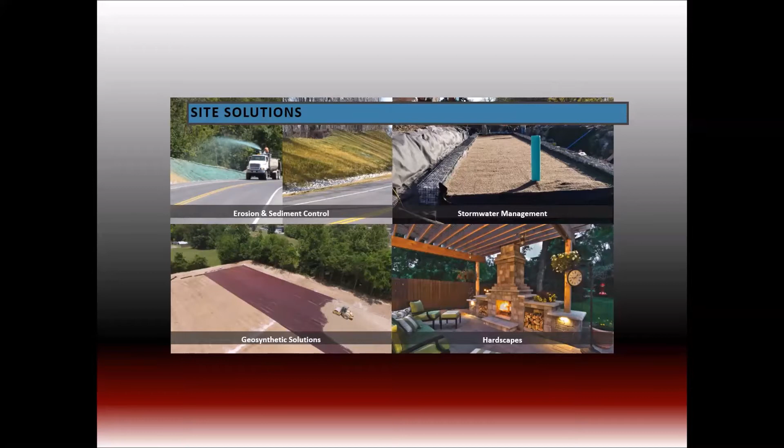And today we're going to talk about one particular solution, which is a BMP. It's just an excellent solution for construction in all of those markets. But I just want you to be reminded that we do carry a whole lot of products, and we are experts at warehousing and logistics.

And one of the things that people like about us is we can put together a custom truck, and we can deliver to the job site exactly what you need and when you need it. Just give us a call and give us a chance.

But like I say, we do actually service some projects that are outside of that mapped area. And we also carry products that may not show up on our website. If you don't know about it, or if you don't know for sure if we carry it, just get a hold of us. And if you come across a really innovative solution, contact me. That's something I do on a daily basis. I'm constantly evaluating what's available in the construction market, and we have a new product committee, and I'm blessed to be a part of that. We are constantly vetting solutions to continue to find the best alternatives for our customers.

So with that, I'm coming back to this opening slide for my friend Chloe, and she has a really awesome personality and a really neat way with people. But when I read her bio, you're going to think that she doesn't have a lot of experience in construction, but that's not true. Her entire career has been in construction.

And one of my favorite things about her is relationships, and that happens to be her title. Chloe Moretz is relationship manager with FODS. In her role, Chloe works as a support liaison to engineers, specifiers, and governing bodies in regards to the FODS system. Additionally, Chloe serves in a business development role, supporting FODS customer relations. Chloe's worked in the construction field for the duration of her career, as I mentioned, and she truly enjoys the innovative, hardworking industry. When she's not talking about trying to keep dirt from leaving job sites, you can find her enjoying her hobbies: skiing, hiking, running, keeping her kid alive, and talking too much.

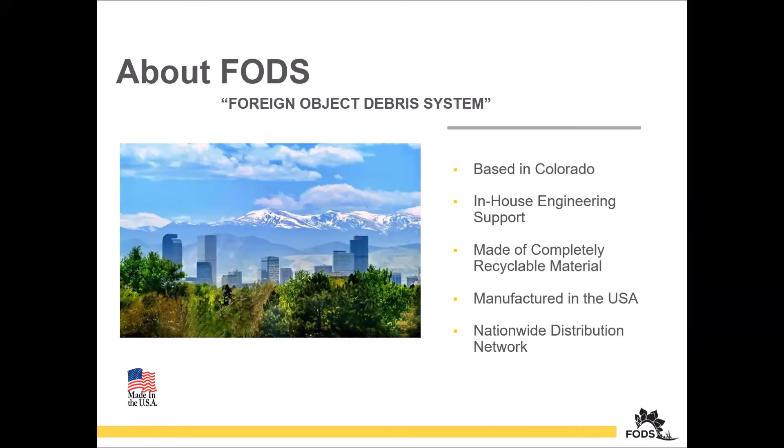Before we get too far, I'd like to take a couple minutes to talk about what FODS are. Basically, FODS are a composite trackout control system used as a substitute for that typical rock construction entrance required by the EPA, which I'm sure all of you have on your sites. FODS provide site access and work to greatly reduce the amount of mud tracked off site by construction traffic. Not only are they ensuring environmental compliance, but they also work to minimize liability. The system is extremely easy to install, remove, and relocate, and it's reusable, with a life of about 10 to 12 plus years, so very durable.

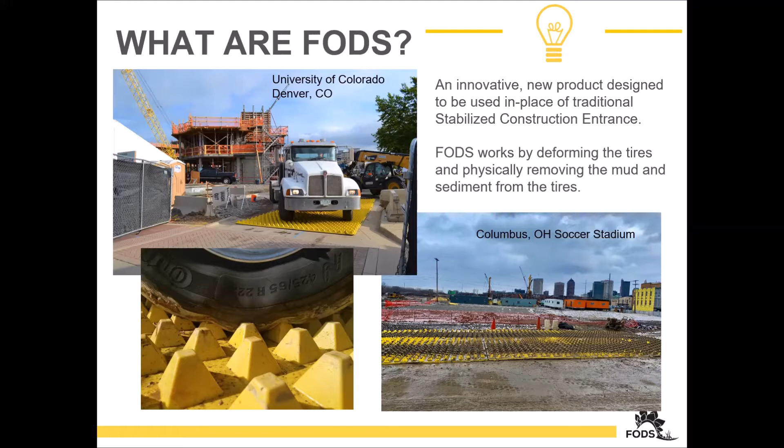If we have any specifiers or engineers on this call, it's pretty self-explanatory, but FODS are typically specified on the stormwater pollution prevention plan or erosion control detail or something similar.

Some quick technical details on the system: it's a modular system, so each mat is 12 feet wide and 7 feet in the direction of travel. The direction of travel does matter—that's the direction the pyramids are staggered in to really open up those tire treads. You can connect the mats together to create whatever configuration works best for your specific site, and we have a bunch of layout drawings on our website that I'm happy to provide you in an email as well.

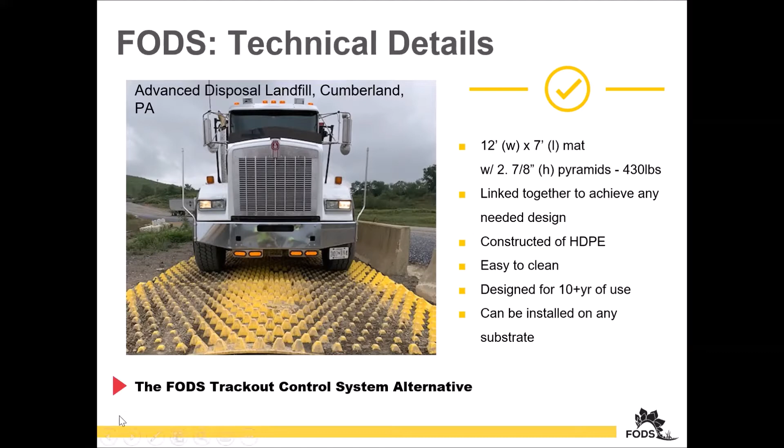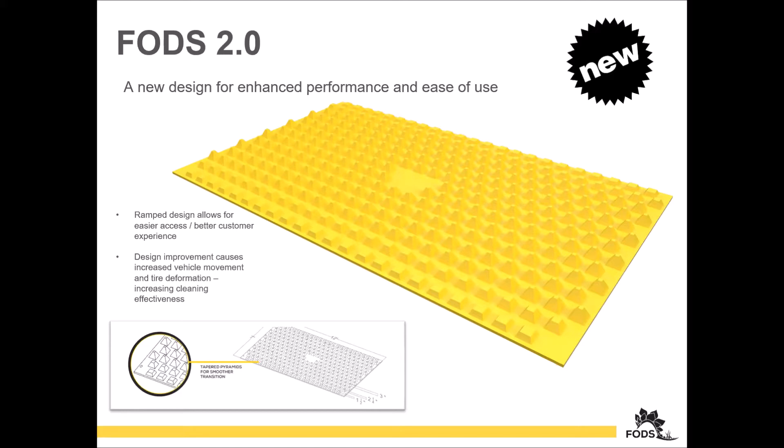We recently got some feedback from several different industries and released a new prototype of our mat. It's just a couple of slight changes, and if you've seen them out in the field before, you'll notice these changes. Essentially, the first few rows of pyramids are tapered in a ramp design to allow all vehicles, including passenger vehicles, to drive onto them easier. Additionally, once they're all connected together, this new design really does increase the effectiveness of removing debris and sediment through greater vehicle vibration and tire deformation as well. So just a quick little update there.

We've had FODS tested by several third-party engineers, one of which was a company called CTL Thompson. They're a materials engineer, and they did various evaluations to determine the strength of the mats. Basically, what they found is they really cannot max out from a weight perspective.

To go into that a little further, each pyramid has a crush rating of over 20,000 pounds. Even your smallest passenger vehicle, like a Prius, that tire's weight is going to be dispersed over at least 4 pyramids, while a larger vehicle more common to a construction site, that tire is going to be dispersed over at least 8 pyramids. So truly can't max out from a weight perspective.

During the testing, they also found that FODS can handle over 1 million vehicle passes of an 80,000 pound vehicle before showing any wear or tear, which really does prove their long life and durability.

Another thing I'd like to mention is the mats have a 15-year UV inhibitor added into the plastic, which prevents them from ever being broken down by the sun throughout their lifespan. On the flip side, we get some questions about cold, and I know we've got some cold areas of the US on this call - you don't have to worry about them becoming brittle from the cold or cracking either. Not a concern.

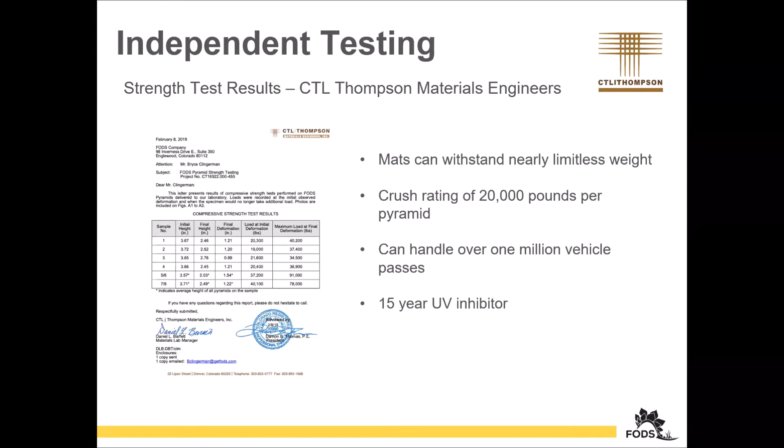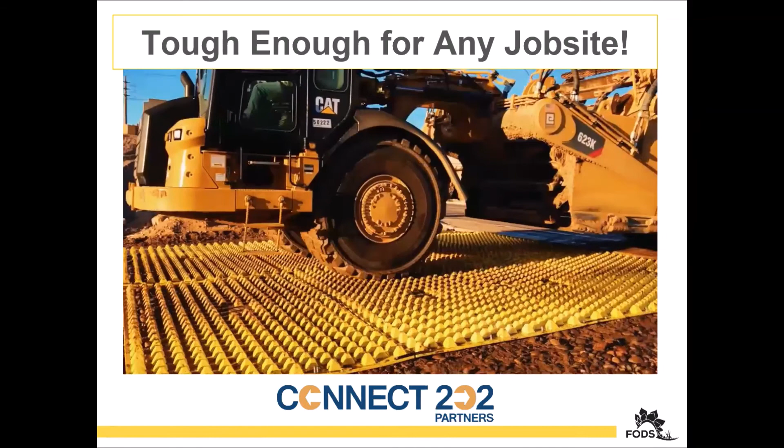I'm going to show you guys a really quick video here that I think does a good job demonstrating the durability of the system. This was taken at a project down in Arizona, actually - a very large, heavy civil project called Connect 202.

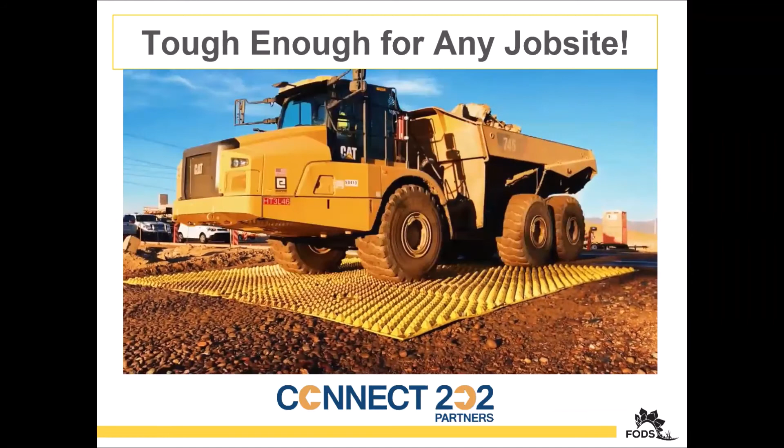What you're seeing in this video is that before the job site was opened, vehicles had started to line up for about 30 minutes just waiting to enter the site. Naturally, once they were allowed on, it was just a steady stream of traffic driving over the mats. This particular video shows almost 2 million pounds driving over the system in just 60 seconds. You can see that the structural integrity isn't compromised at all - the pyramids are still upright. So they really can handle a lot of use and abuse from a weight perspective, and a lot of trucks driving over them every single day.

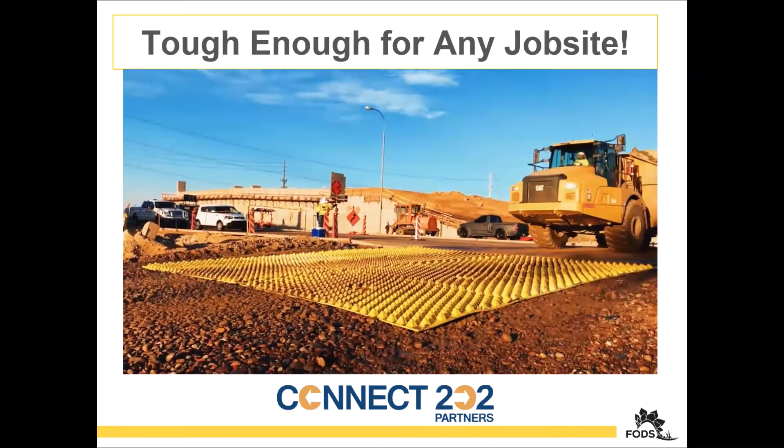Also, I have a 4-year-old son, and he loves this video. I brought him to work with me the other day, and he was like, 'Hey mom, where are all the trucks?' And he was like, 'We're just in an office. This is super lame.' He felt really catfished that that's not actually where my job was. He's like, 'What the heck?'

I'm going to quickly talk about the Colorado DOT spec because it's a good example of the effectiveness of the system. This picture is the general rock construction entrance specification for Colorado. This differs a bit from state to state, usually ranging from 50 to 100 feet. Our partners on the Cascade side, I think it's about 100 feet there, but most of the US it's either 50 or 70 feet in length. Basic elements are all the same though: about 6 inches thick of rock, 6 ounce or 8 ounce geotextile fabric underneath, 12 feet wide, etc. So that's the rock spec here in Colorado.

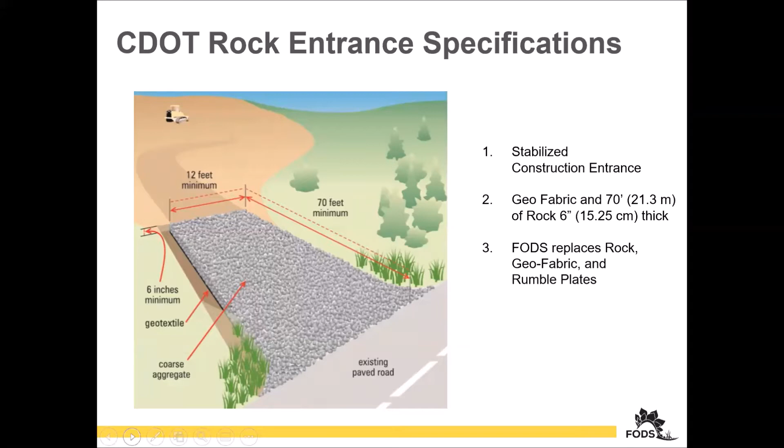FODS were added to the CDOT approved products list a few years ago, and the department actually ended up changing the FODS spec after seeing them perform so well in the field. They reduced the spec from 70 feet to 35 feet, literally cutting it in half. I think this is a great testament to how much more efficient and effective FODS are than stone. This has happened in many other states as well, where we are officially approved - typically that length gets cut in half. We usually see about 28 to 35 feet of travel, and that's our basic recommendation as well. You'll get really great results with that length, getting about 3.5 minimum tire rotations there.

That's another thing I like to point out to both contractors and specifiers. If you decide to use FODS on a project, you really don't need the same length as you would with rock, which can be beneficial as well. If you're on a downtown project or something tighter on space, you can clean off tires even better than you would with rock, using less of a footprint.

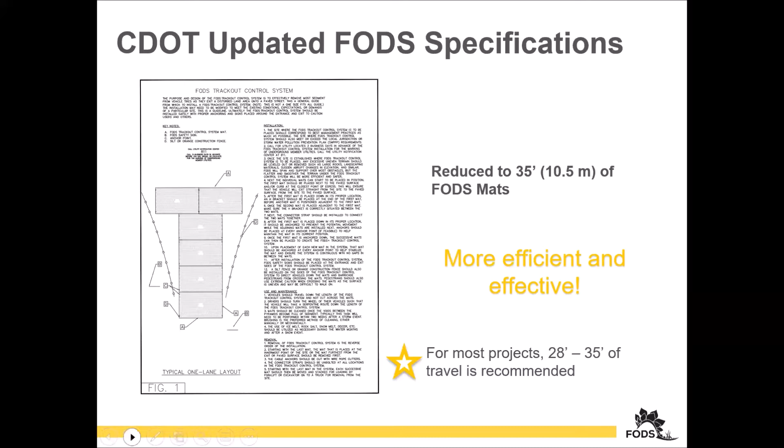So that's just a quick overview of the system, some technical details there. Hopefully that gives you a good idea of the function and exactly what FODS do. I'm going to take a couple of minutes now to talk about some advantages we think it offers, as well as challenges that FODS overcome with the traditional rock method. I'm sure many of you are very familiar with what a traditional rock entrance looks like, but just in case, I've got some quick videos here.

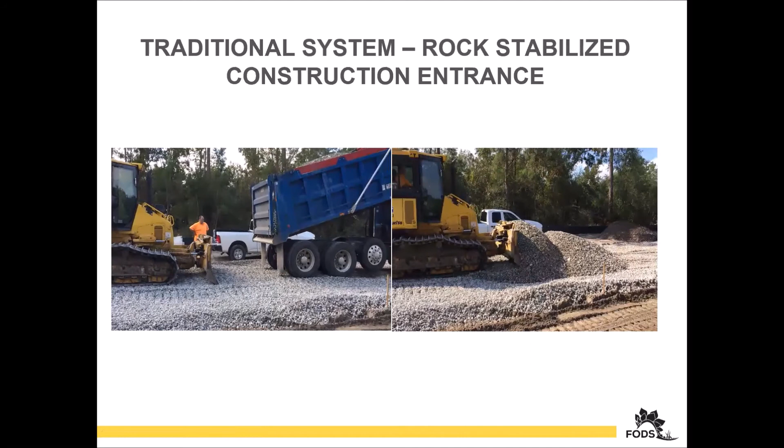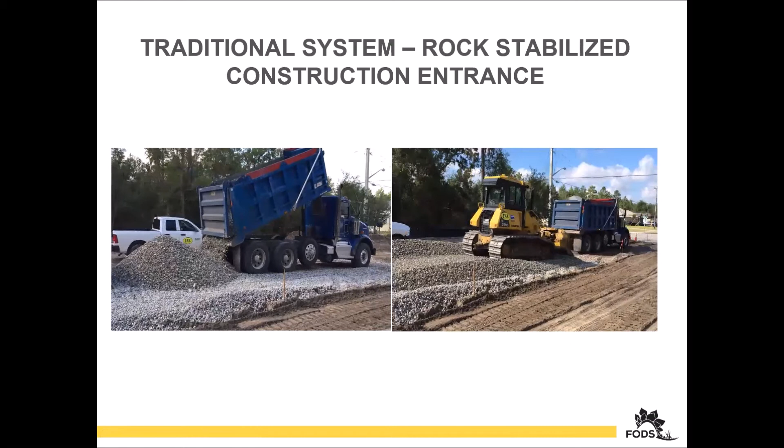You can see that it's a pretty labor intensive process. There's a lot of equipment involved, a CDL driver bringing that rock on site, a guy aggressively pointing in the background - he makes me laugh, I want his job. But the big issue is that this process has to be repeated over and over again to refresh the entrance and make sure it's still effectively cleaning the mud off of tires. It's not necessarily easy or simple.

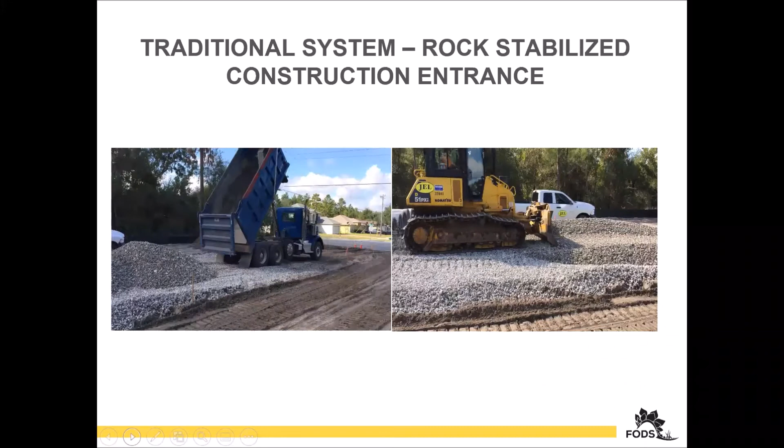That brings me to my first point: rock is at its peak effectiveness when it's first installed. As soon as one vehicle drives over the entrance, it begins to flatten. As many of you have seen, the construction entrance can quickly evolve into a cobblestone road with a few pieces of gravel floating on top. Especially this time of year with a lot of rain and thawing, it can turn into just a muddy mess really quickly.

The other issue is that even with newly installed stone cleaning the mud off tires, any dirt or debris cleaned off the tire just lays there on top of the stone. So naturally, subsequent vehicles drive through that same mud, and before you know it, we're tracking it off site. In contrast, with the FODS system, any debris or sediment cleaned off the tires falls right down to the base of the mat. Tires stay on the top half to a quarter inch of the pyramids, so they don't come into contact with that same sediment, as long as FODS are kept clean - we'll go into that a little later on. The system is literally good as new.

And then, as we mentioned before, it can be placed on any substrate. You can see here in this picture, they just put it right down on top of the dirt, and it doesn't have to be perfectly flat either.

Of course, you don't want to lay it on top of a big boulder or anything like that, but the system has a good amount of flex in the plastic, so it can kind of form to the surface that it's put down on top of. And then once it's removed, the plastic also has memory in it, so it'll return to its original flat shape within just a short amount of time as well.

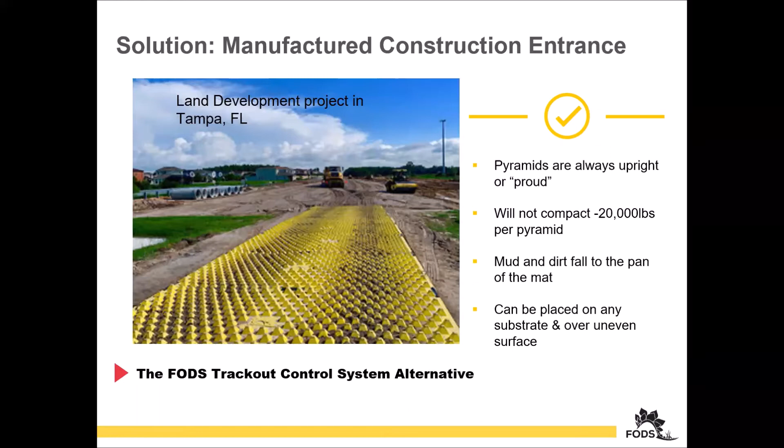The next advantage is the environmental cost piece. Traditional rock entrances require a lot of additional trucks to be brought in, truckloads of gravel to refresh the entrance and make sure it's still effective. Then at the end of the project, all of that stone is considered contaminated, and all that geofabric and rock has to be removed and brought to a landfill to be disposed of. That's a huge amount of environmental impact over time, not to mention a pretty labor-intensive process to repeat on every single project.

And then, of course, since they're not super effective, they do often equal stormwater violations or EPA fines. There was an engineering firm in Wisconsin called R.A. Smith, and they had this really neat software that looked at SWPPP violations. They looked at 1 million different stormwater violations, and they found that 75% of them stemmed from the construction entrance. So truly it is just a traditionally problematic spot.

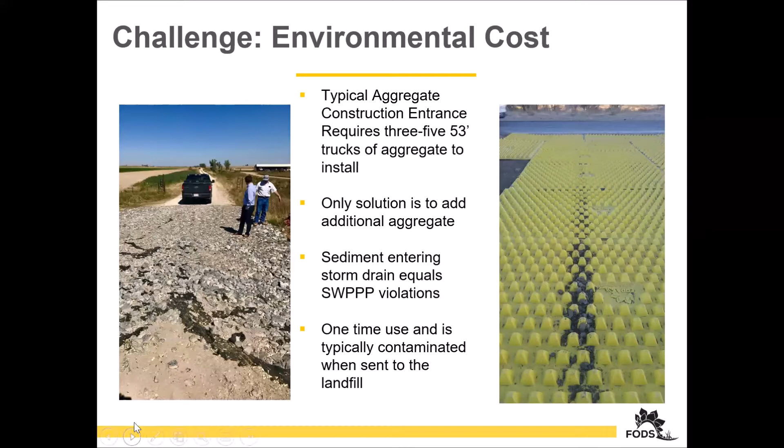Kind of back to that environmental cost piece, this is a very conservative slide based on feedback we've received from project managers and contractors out in the field all the time. They said for your typical year-long project, for the initial install of your rock entrance plus refreshing it every couple months, we're talking about 8 truckloads of gravel being brought on site. And if 8 truckloads are brought in, we're going to have to remove at least that many, probably more because of sediment buildup. But for simplicity, we'll say 8 come in, 8 come out, 16 truckloads of gravel over the life of the project. Whereas with FODS, you can bring onto site the 4 to 6 mats you need for your entrance on a flatbed or trailer, and quickly install them.

They require minimal maintenance over their lifespan, and then at the end of the project, they can just be picked up and brought to another site for years and years of continued use, continuing to use them for over a decade more.

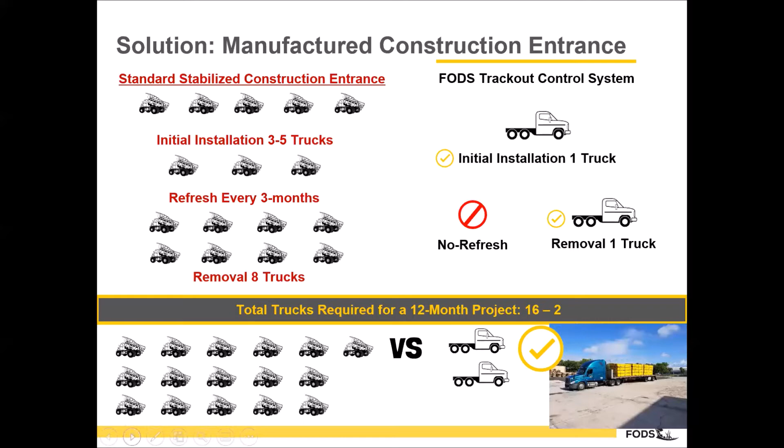Now, we understand the need for a construction entrance and why the EPA requires it to keep sediment from exiting a job site. However, having rock as that final piece before leaving a site really does pose some challenges from a liability standpoint. Rocks can get dragged out into roadways, lodged in vehicle tires, and become like a projectile headed down the highway. In the aviation space, we've seen a lot of success because it's very problematic bringing rock onto those sites, as it can turn into potentially harmful foreign object debris, FOD, on those runways or sensitive areas. It's great to have a rockless method of maintaining compliance on any sensitive areas.

It's a great option there, but really on all projects, the reusability of the mats does offer a large cost savings, and from a liability standpoint those potential savings can be pretty enormous. It's really funny, we have a lot of gravel pits and quarries reach out to us about using mats as vehicles exit their quarry, to get rocks out of the tires. Clearly there's a little bit of an issue with having gravel right there before they enter the roadway. Another place this is important is if you're on a downtown project, or one that's spilling into a busy roadway with cars flying by. It's definitely great to get all those rocks out of the tires before they get on the road.

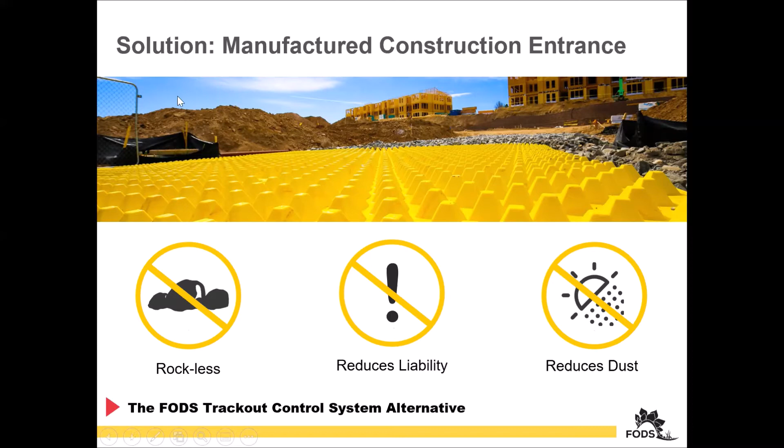And then, of course, the system is also very easy to pick up and move along the site since it's phased, just pick them up, move them down the lines. That's another reason why they decided to use them there.

But I digress. So now I'm going to talk about a couple of case studies here, some real life examples of FODS in the field, as we say. A little cheesy, but gotta love the alliteration, right? So the first case study I'll discuss is in Texas.

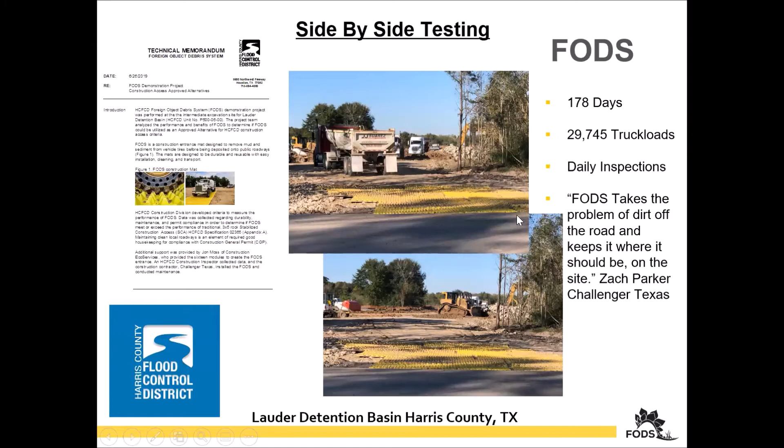After Hurricane Harvey, Harris County, Texas undertook a massive project to reduce future flood risk. This project is still ongoing down there, and it essentially included a lot of excavation jobs, enlarging channels, creating huge stormwater retention basins, etc.

One of our distributors down there in Texas worked with a local contractor called Challenger Services, and they decided to use FODS as a new and innovative BMP for reducing trackout. As part of this BMP test, inspectors from the Harris County Flood Control District recorded the performance and benefits of using FODS entrances versus another typical rock entrance they had on site.

This was really cool for us because we got about 20 pages of unbiased third-party data through the daily monitoring that the flood control district performed. It was about a 20-page report. If anyone would like to see that, please let me know, I'm happy to provide it.

Some of their findings were that FODS reduced roadway cleaning by 59%. Clearly they were doing a much better job than the stone at cleaning off the tires. They also only needed to be repaired once, and a repair consisted of just hammering down a stake that had come up a little bit, whereas the rock entrance required 9 truckloads of gravel to refresh it in just 56 days. So when I said that slide with all the trucks on it was conservative, this is what I'm talking about.

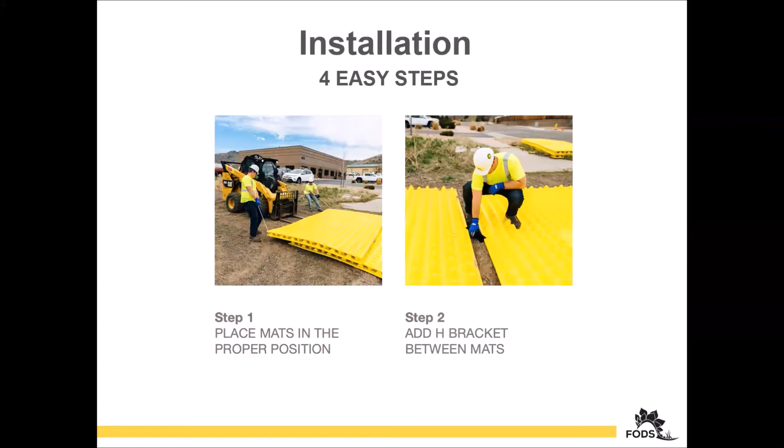The first piece of hardware is what we call an H bracket. Essentially, it's like a little mini I-beam. You're going to place it angled so that the opposite sides are slightly on the edge of the mats, forming this diagonal that you can see in that second picture. I'll repeat that process for however many mats you have, pulling them together. Basically the point of the H bracket is, naturally, once a vehicle drives onto the front of the mat, the other side wants to lift up a little bit, and it just keeps that from happening.

Once the H brackets are in place, you're going to connect them together using our second piece of hardware, which we call a long strap. You place one long strap under the side edge, another on top, align the holes, push these bolts up through the mats and straps, and tighten the nuts.

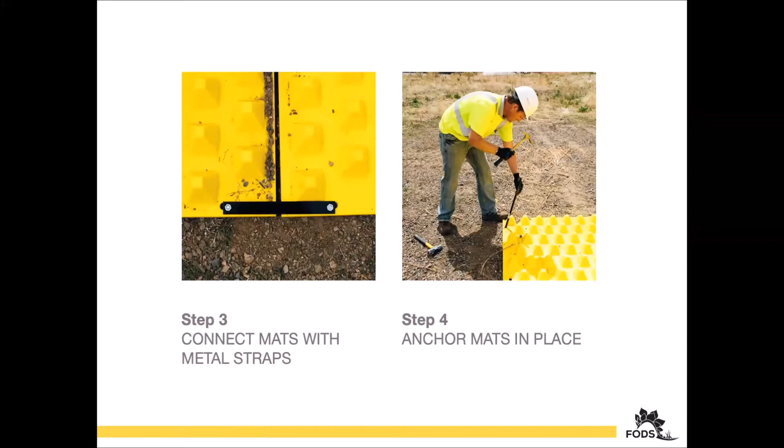After the H brackets and long straps are in place, the mats have essentially become one unit in whatever design the contractor has decided to use, or that the engineer has spec'd on the project. The final step is to anchor the mats in place so they don't shift. The anchoring method does differ a bit depending on the substrate type.

If they're going on top of rock, gravel, grass, something like that, we recommend an 18-inch form stake or nail stake with holes in it. There's a washer and pin in the hardware kit that keeps those stakes from riding up.

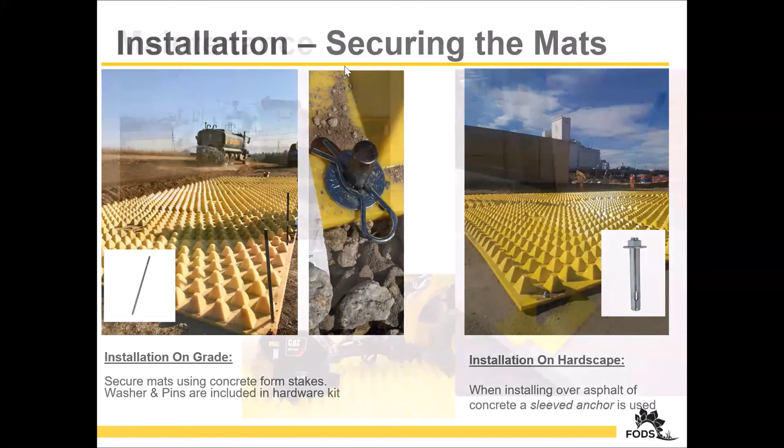If they're going on top of concrete or asphalt, we recommend either a concrete sleeve anchor or a concrete screw, which is what we've been recommending recently and it works really well too. Overall, very simple and easy. Please let me know if I can provide additional info on that install process, and check out our website—we've got some really detailed instructions on there as well.

The question we get all the time is, how do you clean the mats, and when do you clean the mats? First, we recommend cleaning them once about 2.5 inches of sediment have built up in the base of the mat. That's something I really like about the system—there's a quantifiable number for when they should be cleaned. That's helpful for inspectors and cities too; they can bring a tape measure and say these need to be cleaned now. Versus with a stone entrance, it's kind of like, well, looks like trackout's entering the road—there's no quantifiable method for determining when the system needs to be cleaned.

As far as cleaning methods go, this is by no means an exhaustive list. Contractors are super innovative and come up with great solutions on their own, but some of the most common methods we've seen are a piece of equipment like a skid steer with a broom attachment—you brush from side to side, pushing the dirt off the mats within minutes. There's also a manual shovel, this funny looking skinny little shovel. Someone can stand in the middle of the mat on the logo and push the dirt down through the lanes of travel, having a mat cleaned off in a couple minutes.

Because of the type of plastic FODS are made out of, kind of similar to a sewer pipe, the dirt doesn't stick to the pyramids—it doesn't clog up the mats. You just quickly push it down through the lanes of travel; you're not digging it out, not chipping it out. Of course, you can use a water truck too, as long as the water is contained. Sometimes people incorporate a drivable wattle—ASP has all kinds of solutions like that in stock—and also a street sweeper, as long as that head is adjustable. There are lots of other methods we've seen used, but these are just some of the more common.

So that's installation and maintenance—pretty simple. I'm going to go into the costs here for a little bit.

When we talk about cost, FODS are like any piece of equipment—they cost you some money upfront but make you money in the long run. It's different looking at your construction entrance as an asset, but it makes sense once you think about it. The exact ROI and break-even point will differ greatly depending on geography, project type, weather conditions, strictness of compliance in your area, etc. But we've developed and gotten feedback on some general guidelines for when that break-even point is typically found. Of course, contact your local ASP for a quote—any numbers I give you here are just ballpark numbers, they can get you an exact custom quote for your project.

A mat costs approximately $2,600 each. As we discussed, about 4 to 6 mats are most commonly used per entrance, so we're talking like 10 to 15 thousand dollars for a set of FODS. Conservatively speaking, most contractors will find their break-even point no later than a year and a half, and that's pretty conservative based on feedback we've received. They'll also find that break-even point faster if they're moving the mats a lot—probably within the first time they move the mats to a new location. So if it's a phase project like that tollway, you're going to find cost savings really quickly. And this isn't even taking into consideration that FODS can eliminate the need for remediation—they can really reduce costly EPA fines, SWPPP violations, etc.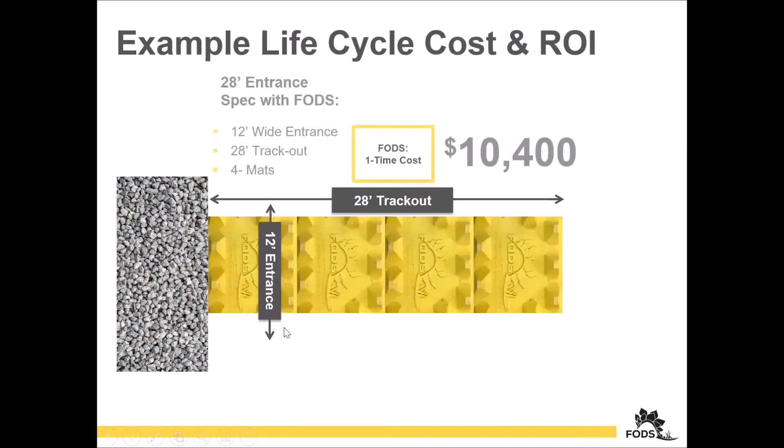I think it was Adam who received feedback from Missouri contractors saying a construction entrance costs them about $5,000. That's on the lower end of what we typically hear. But even in that regard, after using FODS on 2 projects, they're in the clear and still have 10 plus years of life left in the system. So if you have a 28-foot spec, we'd recommend probably 4 or 5 mats for that particular entrance. That's kind of where I got these numbers, and here's a quick breakdown.

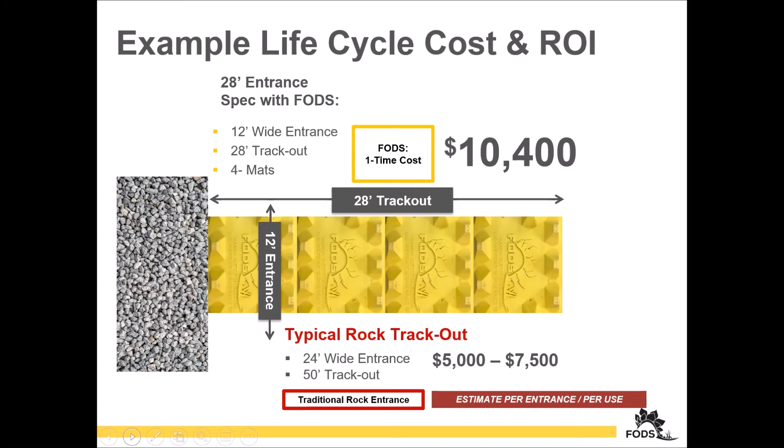Even in the more conservative instances, cost-wise, within about a year and a half or the second use of the mats, you'll probably be finding that break-even point. Anything from there can be used as an advantage for bidding more aggressively, or however you guys want to work that out within your company. It certainly can provide a lot of cost savings over time and a lot of advantage because of the durability and reusability of the system.

That starts to bring me towards the end of my presentation here. Here are a couple of examples of different CAD drawings for layouts that we typically see. We have all of these up on our website, and I'm happy to provide those in an email if you would like, just let me know. These are some of our more common ones.

I do want to highlight really quickly the T-shape. This is a really popular option when vehicles need to make a wide turnout when they're exiting the site, so all the tires can stay on the mats when they're leaving, but you don't have to necessarily buy 2 lanes of travel, because we're worried about tracking out, not tracking in. So this can be a cost-effective option there as well.

Sometimes 2 lanes of travel are preferred, so here's an example of this over here on the right-hand corner. But truly you definitely can find an exact layout that best meets your specific site, and we're always happy to recommend on that as well.

We have at this point 14,000 plus mats out right now in the field being used. So we've seen them on lots of different types of projects, and we're always happy to recommend on a layout that we think would work really well for you all, or work with your local rep that you guys work with at ASP or whatever branch you work with, and develop a solution tailored to your site.

We're also seeing on the specifier side of things a lot of FODS specifications come through recently. Here are just a couple examples I pulled from Construct Connect, which is just a project tracking software. We're excited to see that as well. If you're a specifier, I do have a lot of resources, CAD drawings in different formats, specs, all kinds of stuff like that. Please let us know if we can assist on that side of things as well.

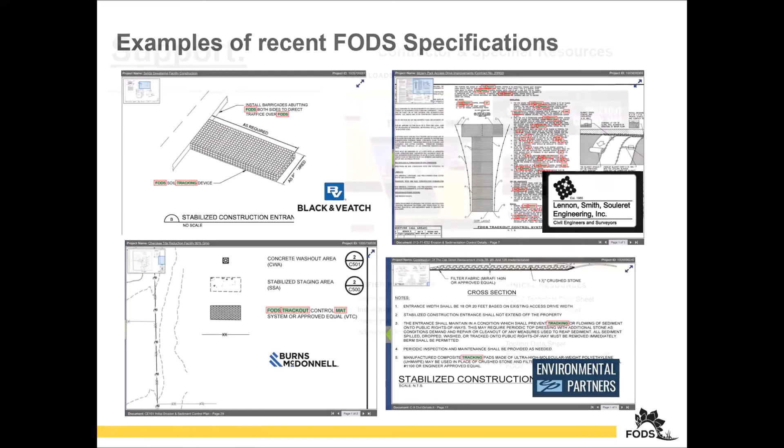From that initial design phase to the final implementation, we want to do whatever we can to assist you guys, whether that be recommending a layout, CAD drawings, engineer side, or finally helping with in-the-field technical support when it comes time to install your entrance. We're here to help, and we have a lot of resources on our website. We're always available by phone or email, and can also work with your local reps, just to make sure you have all the information you need, and however we can help to get FODS out on your site.

Chloe, can I back up to one of your projects here? Yeah, certainly—I'm going back to one of your case studies, which I absolutely love, and it's a friend of ours. Sometimes when you show other people's projects you wonder if people will think you're just being friendly and want to be careful not to offend them. Well, John Moss is a good friend.

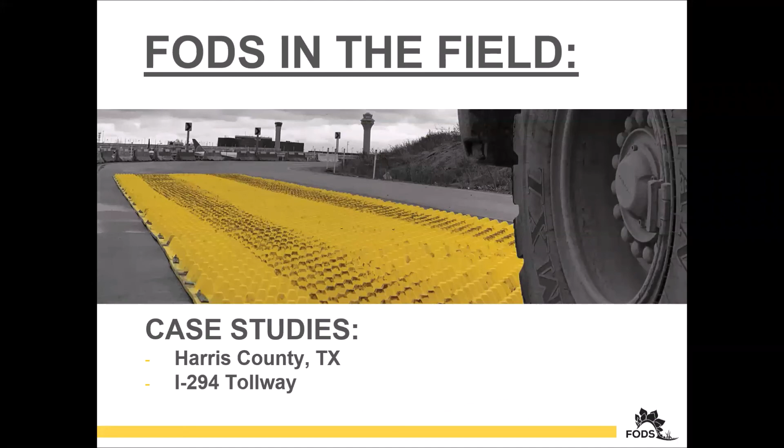And I see on that Harris County project, we do a lot of work with Construction EcoServices. I see the air control tower in the background. Yeah, that's actually Chicago O'Hare, that's another study we have. That's why I wondered, okay, because I saw that picture, but then down below I saw the Harris County one.

On this technical memorandum, I know the text is really small and I'm sure our guests can't read it, but you said it's available. There are a lot of communities that follow Texas, they follow TxDOT, and they follow Harris County Flood Control District. We actually see the benefit of a lot of projects that go through there.

People didn't used to think of Houston as a wet area, right? When I was a kid it was just this big, flat, brown, dry place. But over the past several years they've had tremendous rainfall problems and hurricanes, and a lot of flooding. So they've really stepped up their efforts in water control, water quality, and stormwater management. So for them to say that this Challenger site is a great place where they saw the effectiveness of FODS, I think that speaks volumes for our communities as well. That's a story we have to tell.

So in the Midwest, we have rock quarries. Every county has a rock quarry, so we can get rock and it's affordable. But we have to get beyond what's affordable that very first day you put it down. We have to look at what's effective. That's more important, that's a public safety issue and a water quality issue.

And I'm looking at this picture, and this is exactly what you described, with the bright yellow mats being the obvious entrance. Right, because there's a lot of muddy rock all over the place, like, where do we come on? Yeah, and everything's flat in Houston, so this picture shows about 40 feet, but there could be hundreds of feet where it looks like you could just pull in and out of the property. So you're exactly right, if they were trying to clean that or maintain it, they would have a real mess out on the public street.

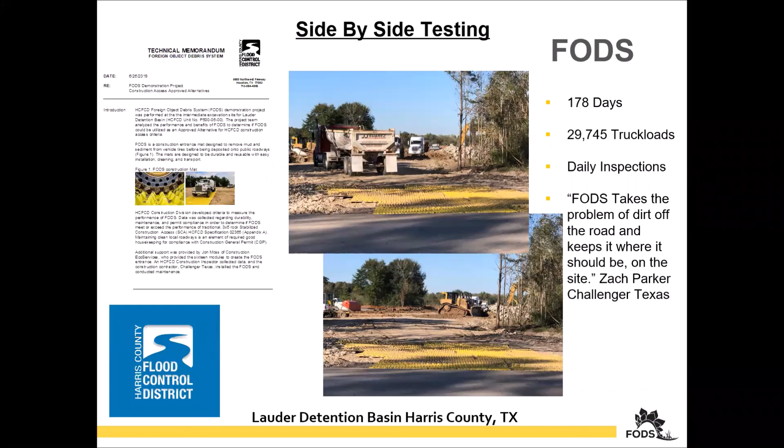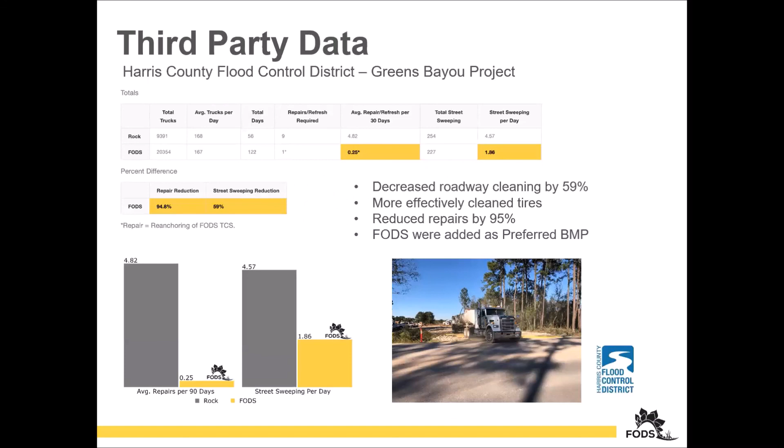So I think that's an excellent case study. And when you talked about 20,354 trucks passing this, that would have been a whole lot of cleanup to do out on the street, and a whole lot of maintenance to bring in a lot more than just 9 truckloads, to repair and refresh that.

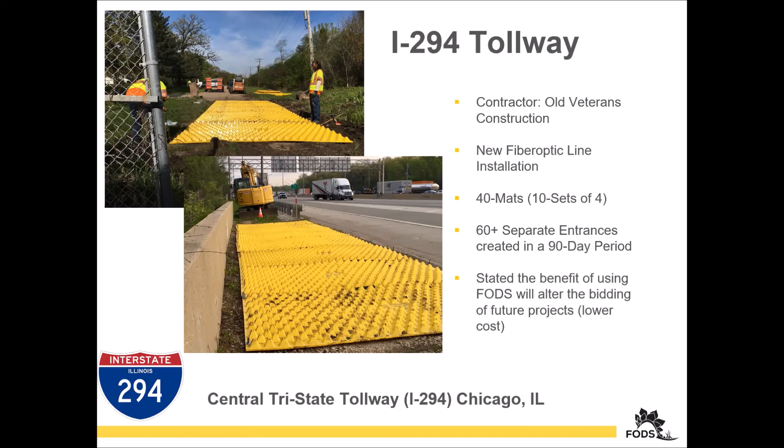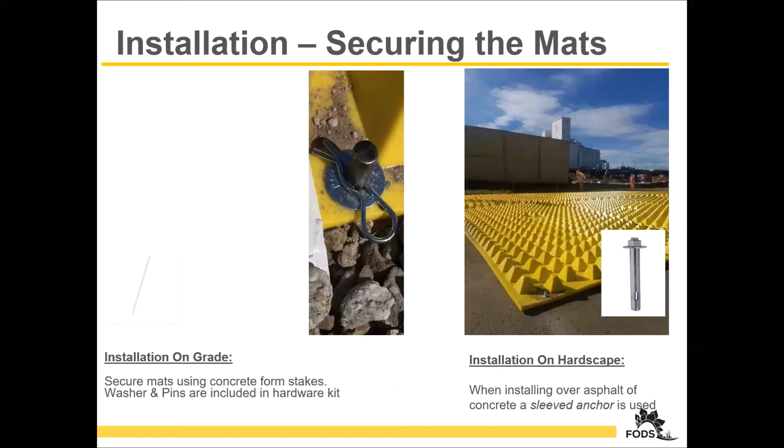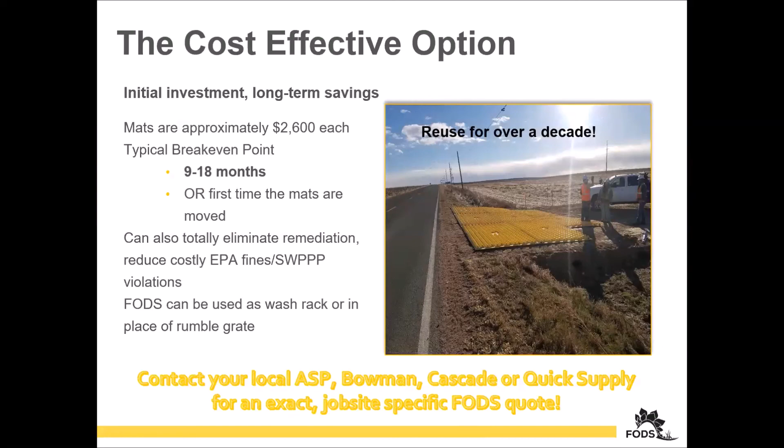One of the things we've noticed recently, across the construction industry, not just our products but others, is the cost of geotextiles is shooting through the roof. Seems like every week we're sending out letters about more price increases. So that obviously comes into play on these construction entrances. And I'm working with a few contractors on different jobs where not only are they putting geotextiles in, but high priced geotextiles in for construction entrances as well, so that's adding to it.

And obviously, like Adam and Mark had sent you the information, Chloe, on the construction entrances, aggregate is cheap in our area here in Missouri, and in my part of Illinois, and in a lot of areas it's cheap, but in other places, depending on how far the quarry is away, it can get very expensive. So I think the timing is perfect for this. I've had a lot of interest from contractors in doing it, and this is a good avenue to get out and explain it and give the layout and a cost comparison. I appreciate you doing that.

The other part I wanted to mention, what you talked about, was various entrances, and the question had come up about the rental. We have been in the rental business, sort of, as Bill mentioned. We typically don't like to do that, but we have been with the rumble grates in the past. We've rented a few of those, and we've had sites where we have multiple entrances, and obviously that gets to be a problem. So the ease of movement of the FODS to various entrances obviously comes into play.

I think with some of the contractors on today, one of the biggest issues we ran into was the aggregate cost in our area, and being able to lay it out and do an ROI on it was very valuable. I know Chloe and I had worked together on a project before and asked her to come on and speak today. I think you did a great job, and I appreciate all you guys' help.